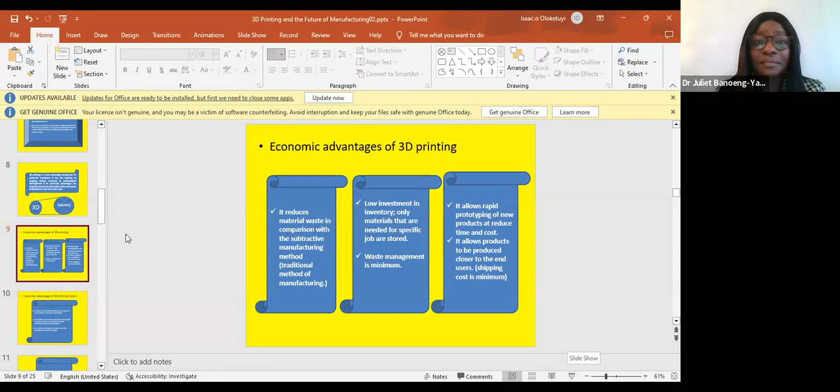Can you hear me, Dr. Oloketuyi? Yes, I can hear you. I want to get my screen on. Okay, sorry, one moment.

Good afternoon, the chairman of this session, the co-speaker Dr. Seun Kolade, the moderator, and the participants from different parts of the world. I say good day to you all. The title of my presentation is 3D Printing and the Future of Manufacturing in Africa. As it has been introduced, I am the current Academic Planning Director of Yaba College of Technology, Yaba, Lagos, Nigeria. I'm a chief lecturer in the School of Engineering, Yaba College of Technology.

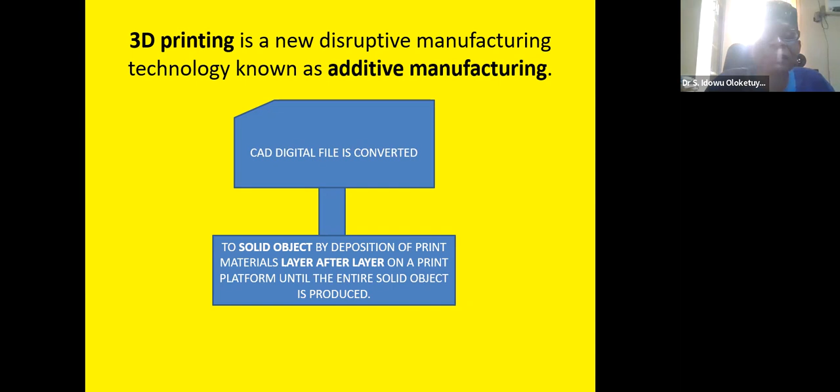3D printing is a new disruptive manufacturing technology, otherwise known as additive manufacturing. It is a technology that converts a digital file of a 3D drawing to a solid object by deposition of printing materials layer after layer on a print platform until the entire solid object is produced.

I would like to state the processes involved. The 3D CAD software, such as SolidWorks, Fusion 360, or AutoCAD, generates the 3D model of the substance to be produced as a solid form. The file that is drawn from the 3D software is saved in STL format. STL means Standard Triangle Language, and this is a mapping process.

The STL file is taken to another software called the slicing software. This software generates a G-code file. This G-code is a programming language for the CNC machine, which is a computer numerical control machine language. The G-code file is copied into the 3D printer before it starts printing. The G-code's purpose is to programmatically move the print head as it deposits material layer after layer on the print platform of the machine.

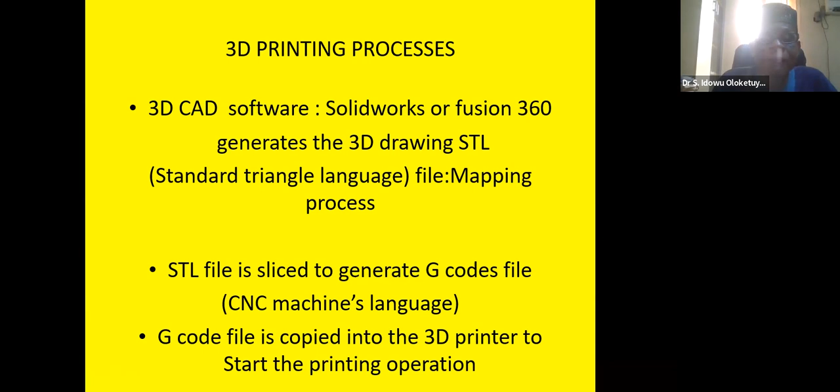There are different technologies used in 3D printing. I'm going to highlight the three most common technologies. The first one is material extrusion. The second one is vat polymerization, while the third technology is powder bed fusion.

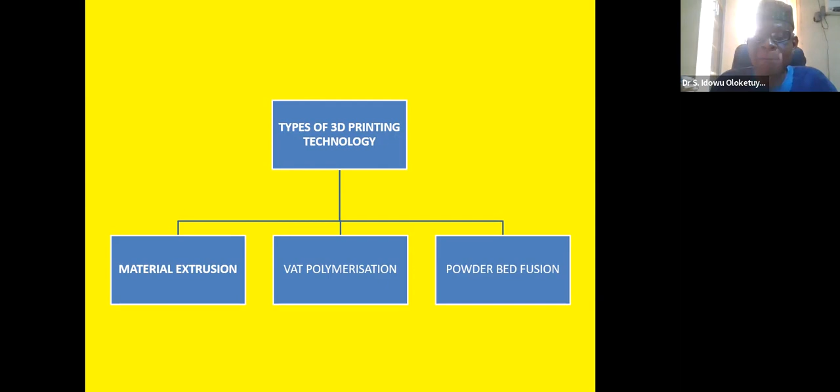Under material extrusion, we have fused deposition modeling, FDM, which is very common. 3D bioprinting is also a common printing technology, used in the medical field, while the other one is construction 3D printing. This is the 3D printer that is used to print houses by civil engineering construction companies.

Then we have another technology used in 3D printing, which is vat polymerization. Vat polymerization operates in a liquid medium, and the liquid medium generally used is a resin. It's a photopolymer plastic that converts from liquid state to solid state under the influence of ultraviolet light. The three types highlighted in this presentation are: one, stereolithography apparatus, SLA; digital light processing printers.

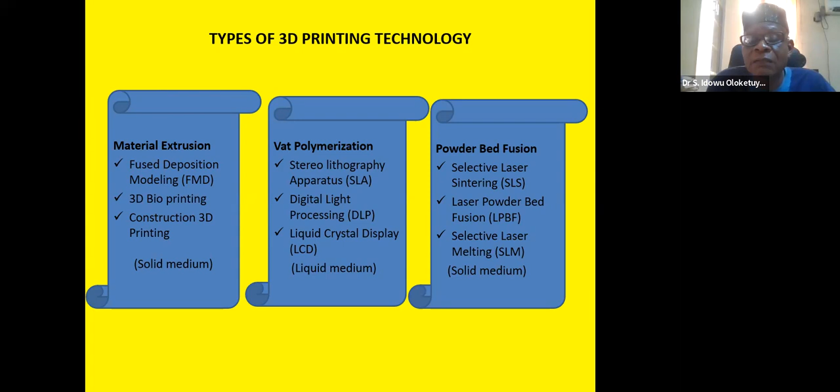Printing materials, there are different printing materials available. We have thermoplastic. Under thermoplastic, we have what is generally referred to as ABS, acrylonitrile butadiene styrene. We have PLA, polylactic acid. This is a biodegradable plastic. Then we have photopolymer resin.

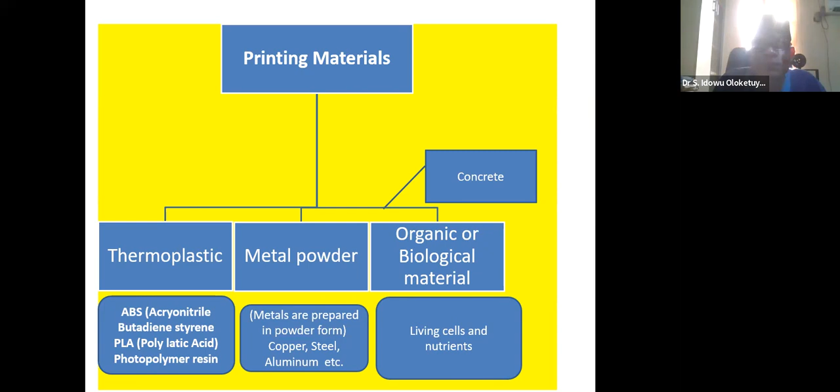Then under metal powder, metals are prepared in powder form for this type of printer. We have metals like copper, steel, and aluminum. Organic or biological material is also used. This is a 3D printer used in the medical field, and the materials for printing are living cells and nutrients. Also, we have concrete for prototype houses. Concrete is a printing material under this category of 3D printer.

From statistics and from literature review, the contribution of Africa to manufacturing is grossly very low, at about 1.9%. This information is obtained from industrialized Africa, compared with what is happening in other parts of the world. 1.9% is small, and the need to increase this percentage is one of the objectives of today's presentation.

Also, from literature review, the value of 3D printing as at 2020 was 13.78 billion US dollars, and the expectation is that the annual growth rate of this capital is about 21%, and by 2028 it will be about 62.79 billion US dollars, according to Kolade, Adegbile, and Sarpong's 2022 publication on 3D printing.

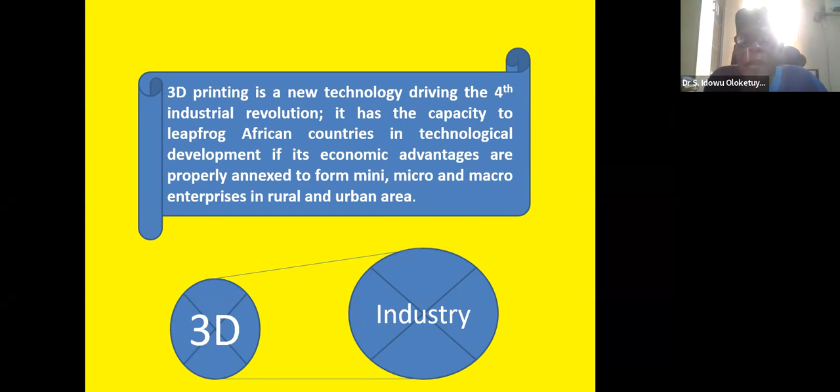3D printing is a new technology driving the fourth industrial revolution. It has the capacity to leapfrog African countries in technological development if the economic advantages are properly harnessed to form mini, micro and macro enterprises in rural and urban areas.

Here I want to highlight the advantages of 3D printing. 3D printing is an additive manufacturing process, and the traditional manufacturing method known to almost everybody is called subtractive manufacturing. To set up an industry that uses subtractive manufacturing requires a huge amount of money or capital.

But in additive manufacturing, the required capital to set it up is small. So as we go through the advantages, we see some of the reasons why one is correct to say that 3D printing can actually leapfrog African countries to a high-tech level. One, it reduces material waste in comparison with subtractive manufacturing, the traditional method of manufacturing.

Two, low investment in inventory. Only materials needed for a specific job are stored in a 3D printing industry. Waste management is minimal because material is added as it builds the solid objects. There is little or no waste produced from the machine, so the cost of managing waste is not part of the project.

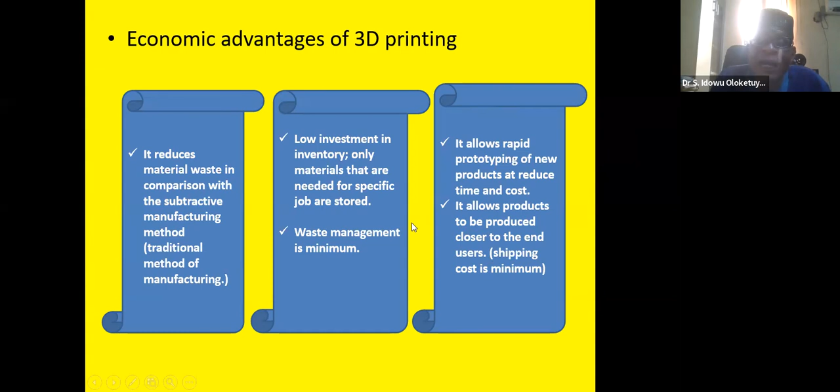It allows products to be produced closer to end users. As a result, shipping cost is minimal as far as 3D printing is concerned. It requires small capital investment and space to set up an additive manufacturing industry. Low capital investment is required in acquiring a 3D printing machine in comparison with traditional manufacturing machines.

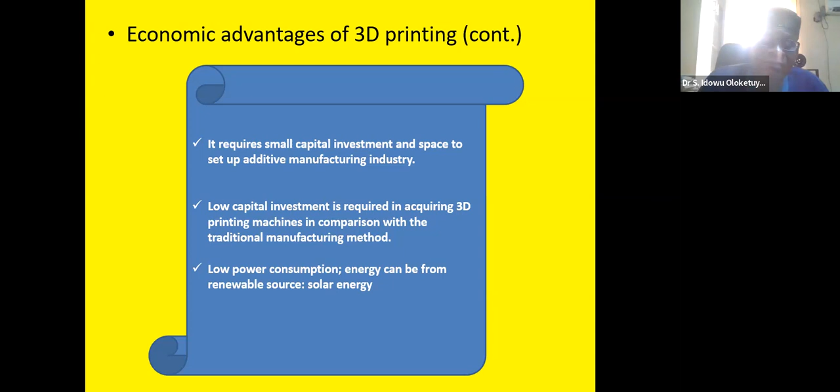Low power consumption: the energy required by 3D printers is small, so energy can come from renewable sources, e.g. solar energy, especially in rural areas. It is easy to accept 3D printing in Africa, which is technologically underdeveloped compared to developed countries, because of the huge capital investments in the traditional method of manufacturing.

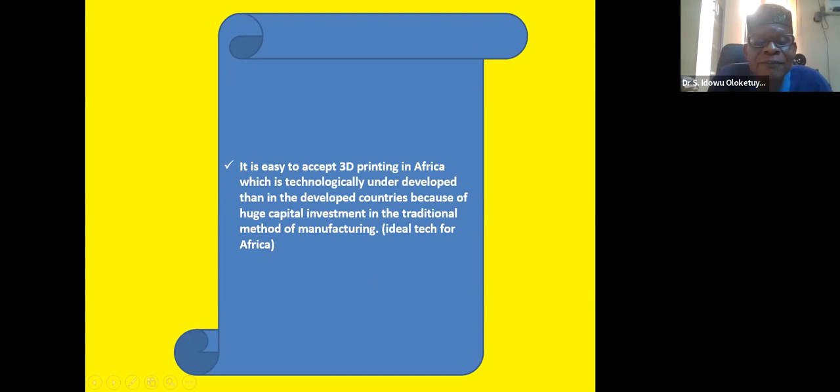This is an ideal technology for Africa because it doesn't require much capital input to set up a 3D printing farm or 3D printing shop. Experience in the old technology is less useful because it's a new technology. 3D printing does not need centralized high-volume production.

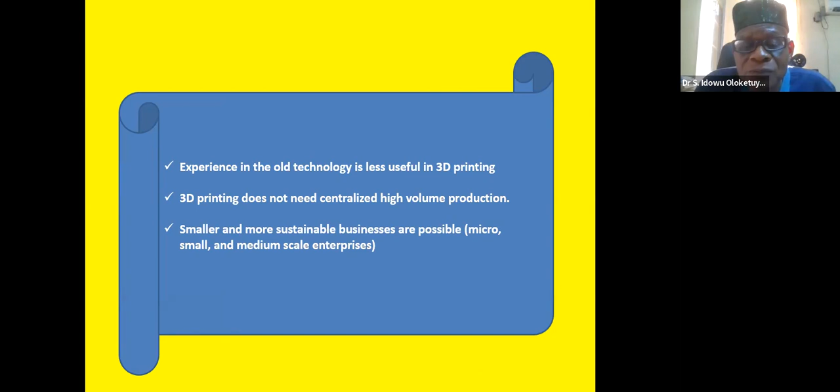Small and more sustainable businesses are possible through 3D printing technology, as earlier explained. So, 3D printing current development in some African countries: many African countries are still lagging behind in creating proper awareness concerning 3D printing, otherwise known as additive manufacturing, due to political or economic factors.

However, other countries have started setting up structures for proper takeoff of the technology. In Kenya, academic institutions, industries, and government are engaged in promoting 3D printing manufacturing research and development, according to Kolade, Adegbile, and Sarpong's research work of 2022.

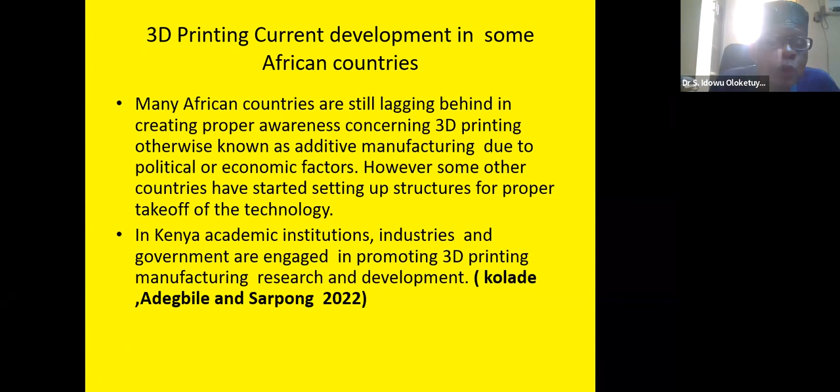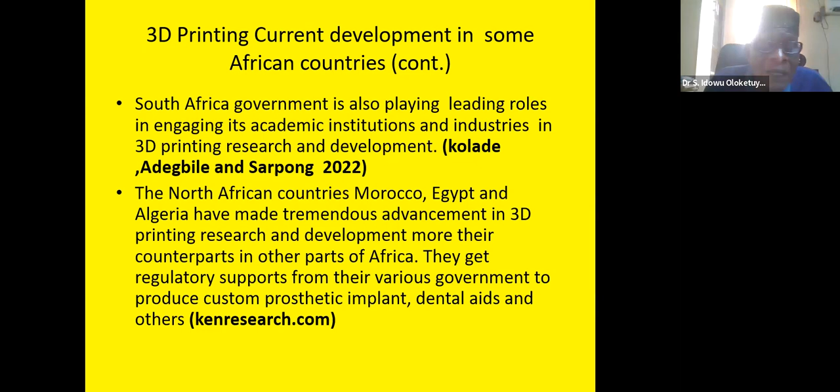South Africa's government is also playing leading roles, engaging academic institutions and industries in 3D printing research and development. The North African countries Morocco, Egypt, and Algeria have tremendous advancement in 3D printing research and development, more than their counterparts in other parts of Africa. They get regulatory support from their various governments to produce custom prosthetic implants, dental aids, and other materials, from kenresearch.com.

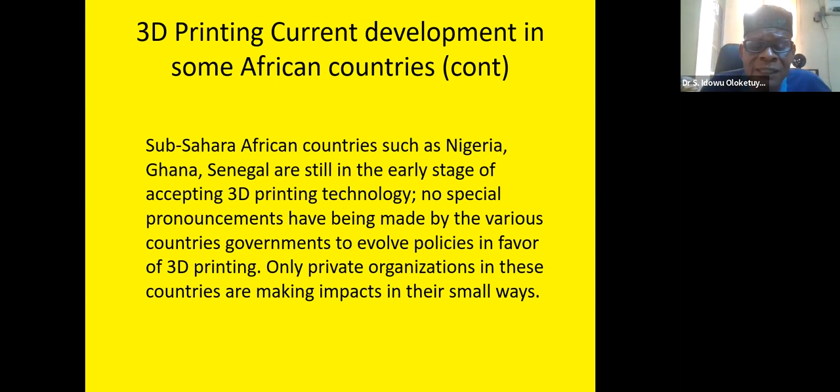Sub-Saharan African countries such as Nigeria and Senegal are still in the early stage of accepting 3D printing technology. No special pronouncements have been made by the various countries' governments to evolve policies in favor of 3D printing. Only private organizations in these countries are still making impacts in their small ways.

Strategy to drive 3D printing innovation and entrepreneurship in Africa: there must be synergy among academic institutions, governments, and industry to actually make 3D printing thrive very well in Africa. The government's roles are: first, they must create the enabling environment by reducing taxes on 3D printing components, by evolving a good education policy, and by granting loans for research and development.

Infrastructures should also be in place, like a constant supply of electricity. In Africa, we have issues with electric power supply, and 3D printing requires an immense amount of printing hours that require electricity. Information and telecommunication technology is also very important for the 3D printing industry to prosper in Africa. Provision of loans for micro, small, and medium 3D printing enterprises is also very important.

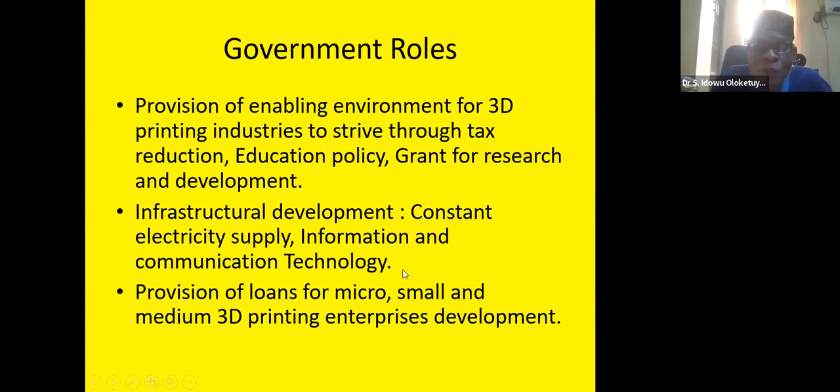Academic institution roles: Africa is endowed with natural resources. Research is still going on in 3D printing to get new materials that may probably increase the efficiency of the system, and Africa has enough raw material to carry out this research. This is the responsibility of academic institutions.

Development of curriculum for 3D printing, which will dovetail into existing courses in art, science, and engineering, is also very important. Provision of different manpower for development of 3D printing at different levels of education.

Equipment researchers are needed because we must not only be using the 3D printer, we must go to the next level of producing printers ourselves from the different resources that we have. Material researchers, product designers, and craftsmen are also required.

Academic institutions, universities, and other tertiary institutions should have innovation hubs where research accomplishments in 3D printing can be tested for commercialization before deploying them to the industry. They must seek grants to develop more efficient 3D printing processes and materials, especially for non-biodegradable waste plastic products and electronic products littering streets in Africa.

Industry roles: the industry must readily be on ground to accept research outputs, so that industry can be built from research outputs to increase the GDP of the various countries in Africa. The industry must be ready to carry out research findings to commercialization level, and also they must be ready to provide grants for further research.

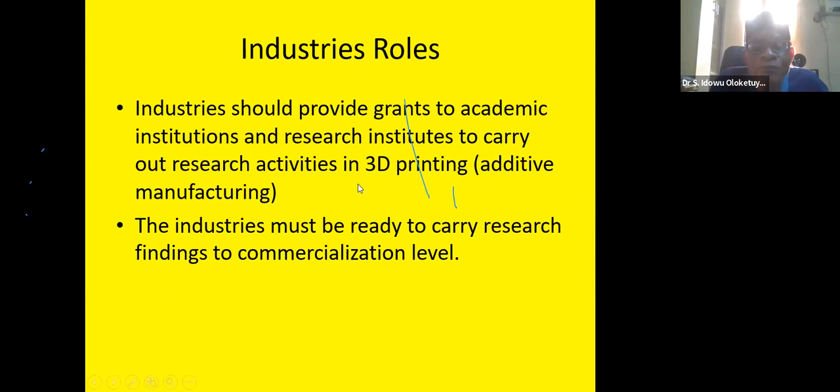So businesses that can come up from 3D printing: product customization business, promotional products for advert agencies can also be produced with 3D printing technology. Spare parts for old machines that have been abandoned due to lack of spare parts, probably because the manufacturers are no longer producing such models - 3D printing will solve such problems.

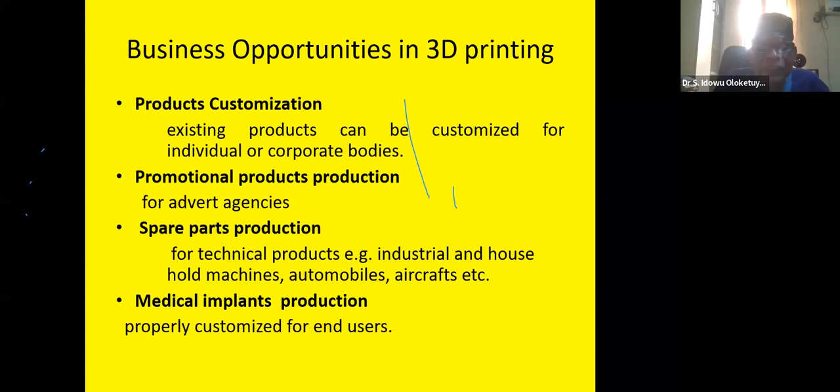Medical implants production is also very possible - artificial limbs, artificial teeth, or anything artificial that can make life sustainable is possible through 3D printing. Prosthetic development and production items such as artificial limbs and teeth are customized for users. There is no problem of undersizing or oversizing the end user because the product can be produced based on specification.

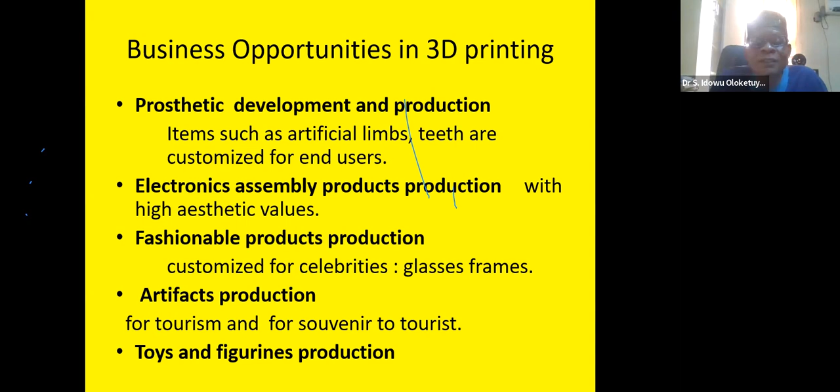Electronic assembly product production can also come from 3D printing technology. Fashionable products production, customized for celebrities, glasses frames can be produced. Artifacts that have been produced for many years, probably with wood or stone, can be reproduced with plastic and some other materials for tourism, and even to serve as souvenirs to tourists at different tourist centers we have in Africa. Toys and figurine production is also possible through 3D printing.

Jewelry, customized jewelry production, engineering product development, rapid product prototyping centers are also possible to set up, to help create employment opportunities for engineers and scientists. Architectural model development centers are also possible - people in architecture can design houses and get the 3D model of the house for better presentation to the clients.

Home decor products development centers can also come up from 3D printing. CAD/3D printing training centers can also come up from 3D printing technology. So the list is endless as far as businesses that can be generated from 3D printing technology.

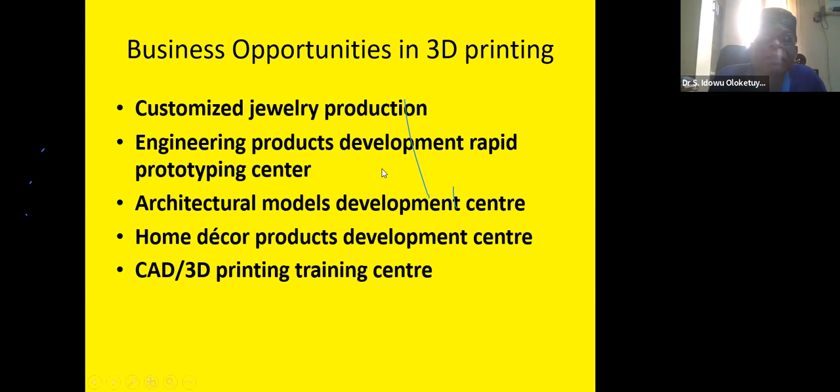Conclusion: 3D products are novel products. They are attractive to consumers. They are excellent for business.

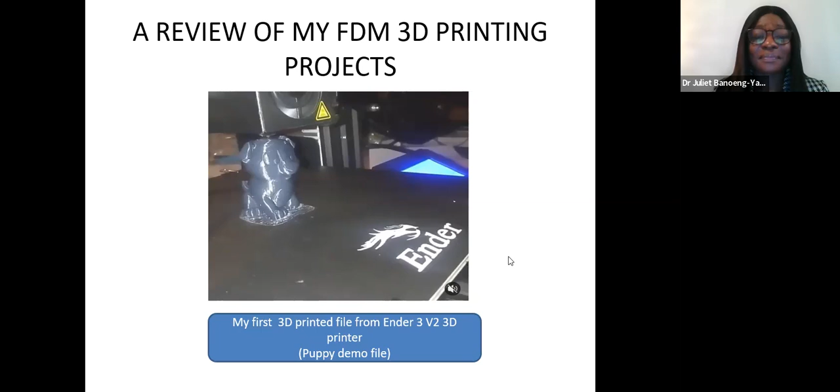Okay, thank you. This is the first 3D print I made from the demo file of my Ender 3 Version 2 3D printer, and it came out fine. After that I produced this slider crank mechanism. I teach mechanics of machines at Yaba College of Technology, including linkage mechanisms, and this is one of the laboratory apparatus required to study the car engine mechanism. A student can use it to perform experiments, measure the angle of the crank and the slider distance, and get the velocity as a result.